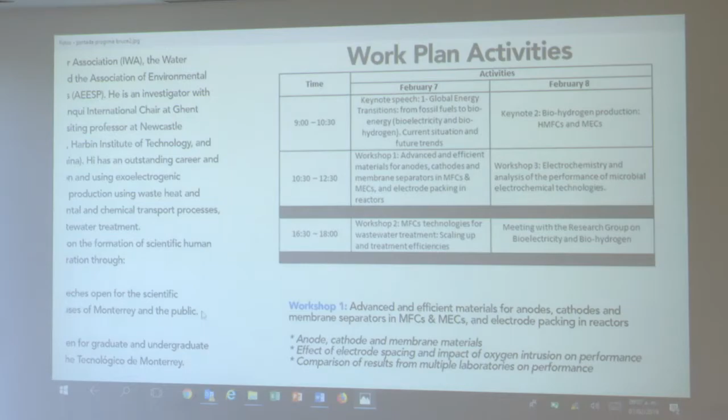Before starting, I would like to introduce Professor Bruce Logan, and I will show you a very brief summary of his experience, a very long experience, that you can also read here on the screens.

Professor Bruce Logan is an Evan Pugh University Professor of Engineering, the Stan and Flora Kappe Professor of Environmental Engineering, and Director of the Engineering Energy and Environmental Institute at Penn State University. Professor Logan is also an editor of ES&T Letters and a former associate editor of ES&T, both published by the American Chemical Society. He is currently conducting research efforts in renewable energy production and development of an energy-sustainable water infrastructure. Dr. Logan has mentored over 130 graduate students and postdocs and hosted over 40 international visitors to his laboratory.

He is the author and co-author of several books and over 500 refereed publications. Professor Logan is a member of the U.S. National Academy of Engineering and a fellow of the American Association for the Advancement of Science, the International Water Association, the Water Environment Federation, and the Association of Environmental Engineering and Science Professors.

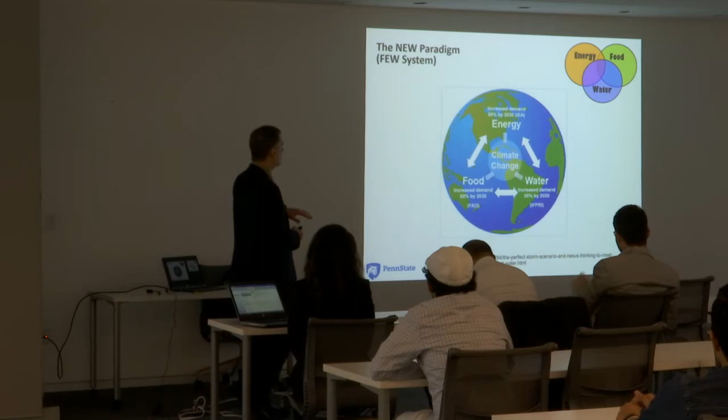So this is really the bigger picture: energy, our environment. A lot of people are casting this between energy, food, and water. Certainly all those things are tightly interwoven, as well as the focus on climate change and the idea that we might have unlimited energy seemingly sometimes, but if it's derived from fossil fuels, that's a problem relative to climate change. And so really what we would like to do is pursue energy technologies that are renewable, and avenues of providing things that we want in our lives without perhaps consuming energy, particularly within the water nexus.

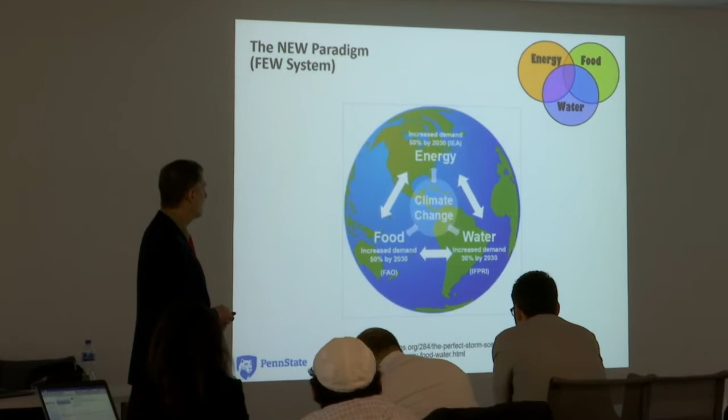The traditional view of our water infrastructure is we get as much water as we can, we don't worry about how much energy we use, and then when we're done, we call it wastewater and throw it away. But in the future, it's not wastewater, it's used water, and it's water that can provide an opportunity for resource recovery. For example, extracting energy out of the organic matter in the wastewater, or recovering nutrients and using them as fertilizers. And the water itself, of course, is a hugely valuable resource for other uses. So we don't look at it as a waste anymore, we look at it as a resource.

In my research, I've been particularly interested in the energy sustainability of the water infrastructure, and looking at how we can cut that cord between a power plant and a wastewater treatment plant, so as to not consume so much energy, or maybe even to produce net energy at a wastewater treatment plant. So how do we do that? Well, we can look at things in the water.

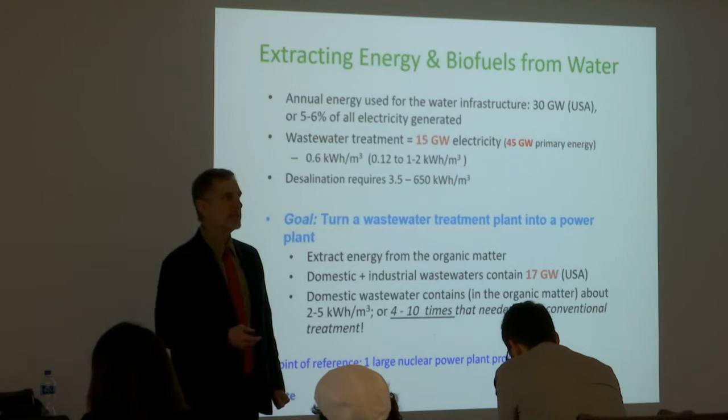In the US, we use about 5% of our electricity on our water infrastructure, and that amounts to about 15 gigawatts of electricity for our wastewater infrastructure. This is clearly not sustainable globally for adequate water and sanitation. It's too much energy, and so we need to find ways to reduce that. If you just think about the fact that 15 gigawatts of electricity is used, that probably means 45 gigawatts of primary fuel, oftentimes fossil fuel.

So eliminating the use of that electricity could potentially save 45 gigawatts. A gigawatt is essentially a nuclear power plant or a very large coal plant. So we'd like to turn the wastewater into an energy source. Typically, there's about 4 to 10 times as much energy in the wastewater than we use to treat that wastewater. So if we can obtain only a fraction of that energy back, the wastewater treatment plant could become self-sufficient.

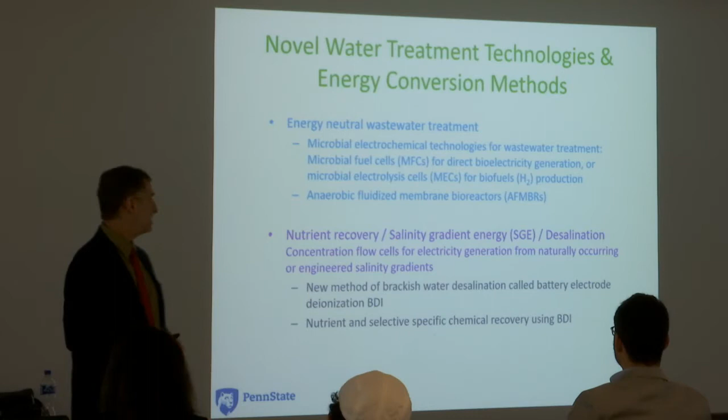So I'm going to talk about today about two subjects. Most of the time I'll be talking about this energy neutral or energy positive wastewater treatment. And then if we have time at the end, I'll just talk a little bit about nutrient removal and desalination, which are somewhat related topics. No microbiology in those, but of relevance to the sustainability of our water infrastructure.

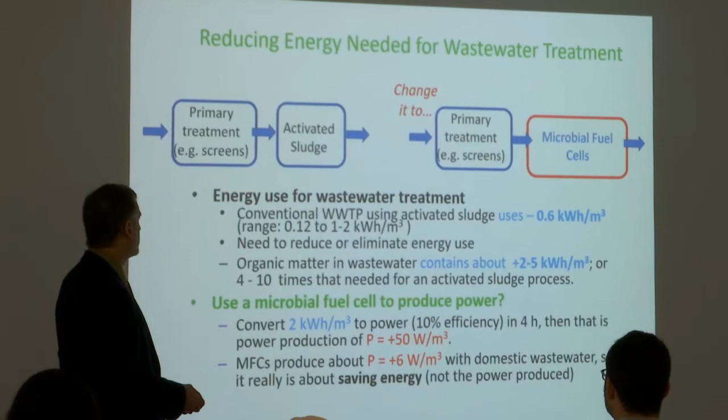So the idea here is to take a wastewater treatment plant, which is conventionally primary treatment, particle removal, and something like activated sludge, and take out that activated sludge system, which consumes a lot of energy in aeration, and substitute in perhaps something like a microbial fuel cell, which can actually generate electricity. Now, we currently use about 0.6 kilowatt hours for every cubic meter of wastewater we treat. But as I said, there's a lot more than that in the wastewater itself. So, how much of this energy could we really get back?

If we were to convert, say, 2 kilowatt hours per cubic meter in the wastewater into power at 10% efficiency, that's about 50 watts per cubic meter that we'd get back. Now, that's not a lot of energy, but as you have more and more thousands of cubic meters of wastewater, it actually starts to add up.

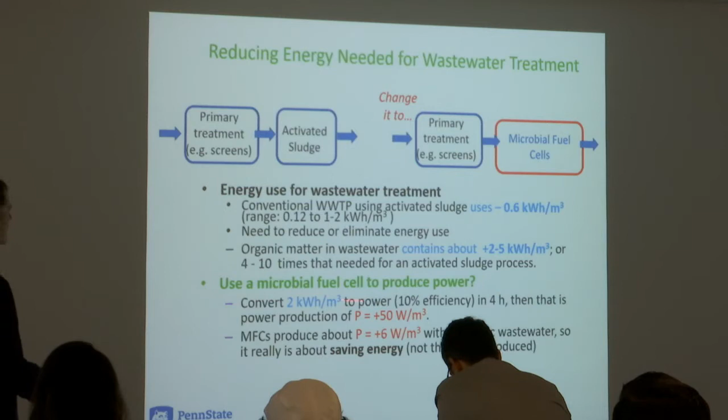More importantly, we're not using this energy to treat the wastewater, so it becomes a self-sufficient process. That's our goal. I don't think a wastewater treatment plant is going to replace a large power plant, but certainly we can remove the need for energy at that plant, or perhaps one day produce net energy. Right now we're looking at maybe only 6 watts per cubic meter, so there's an opportunity for increasing that power production and increasing the energy recovery.

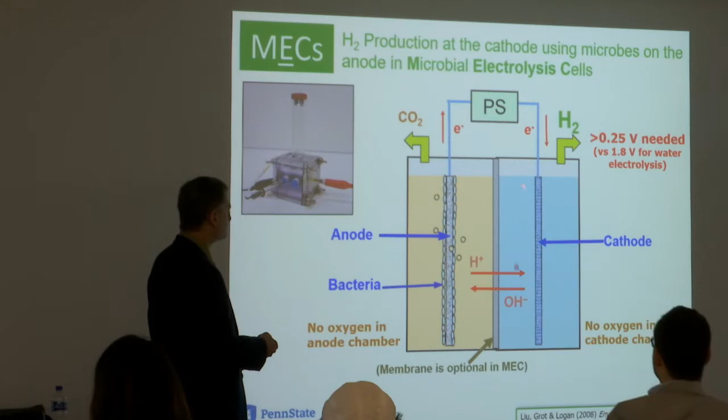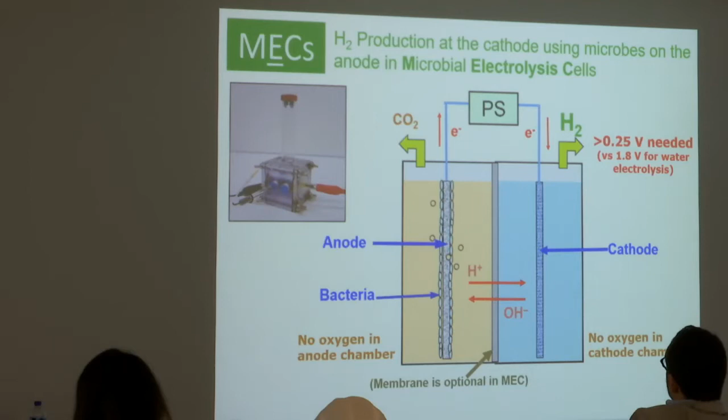We can also take the same system, shown here with a membrane in between the two electrodes, and instead of having oxygen here, we can add a little bit of extra power into the system, and instead of reducing oxygen, we can reduce water, essentially reduce protons, to produce hydrogen gas. So this is electrochemical hydrogen production, but the source of electrons is organic matter. And because we use organic matter as a favorable reaction as opposed to an unfavorable water splitting reaction, the energy needed to do this is a small fraction of what's needed to split water.

In my talk tomorrow, I will talk about microbial electrolysis cells. Today I'm mostly going to focus on microbial fuel cells. But in the general scheme, these are called microbial electrochemical technologies. They're electrochemical systems if it's just a study, but a technology if it's doing something. They can have microbes on the anode or microbes on the cathode, or both, but there has to be microbes on one of the electrodes to make it a microbial system.

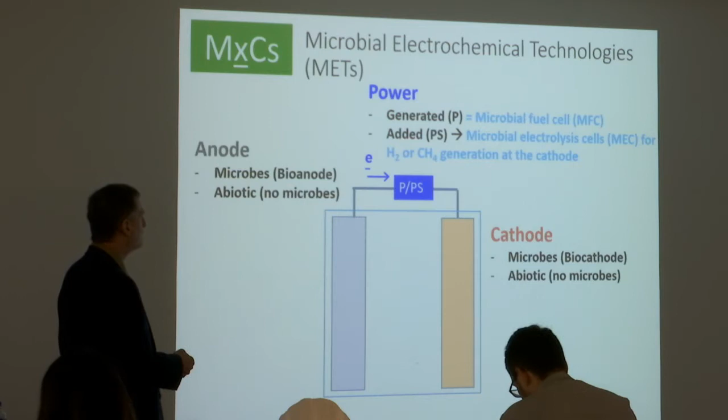Sometimes we generate power, like in a fuel cell. Sometimes we add in a little bit of power to create hopefully valuable products, such as hydrogen or maybe methane. And there can be a membrane here or no membrane, or there can actually be stacks of membranes in different configurations. I'm not going to be able to talk about all those today, but I will talk about the importance of a membrane, particularly tomorrow.

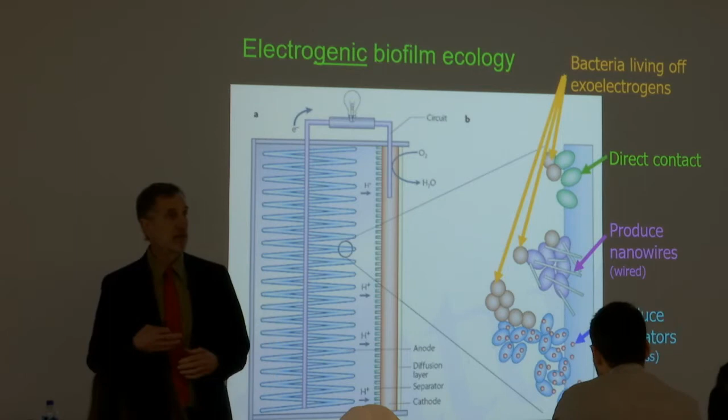So you have, in this case, a very highly porous 3D structure—this is a brush—and you have microbes that grow on that brush. The ones that can break down organic matter and make electricity, we call them exoelectrogens, able to transfer electrons outside the cell. They do that by either making direct contact with the surface, or some microorganisms produce nanowires, electrically conductive filaments that convey the electrons from the cell to the electrode. Some produce mediators, chemicals that shuttle the electrons between the cell and the surface. And within these communities, there are always other microbes that just live off the exoelectrogens' breakdown products, or maybe they ferment substrates for the electrogenic microorganisms to use.

This is a figure from a paper that will be published shortly in Nature Reviews Microbiology. What we show is that there are microorganisms from all three domains of life—bacteria, archaea, and eukarya—that can produce an electrical current. It's really remarkable that microbes with such great diversity can produce an electrical current.

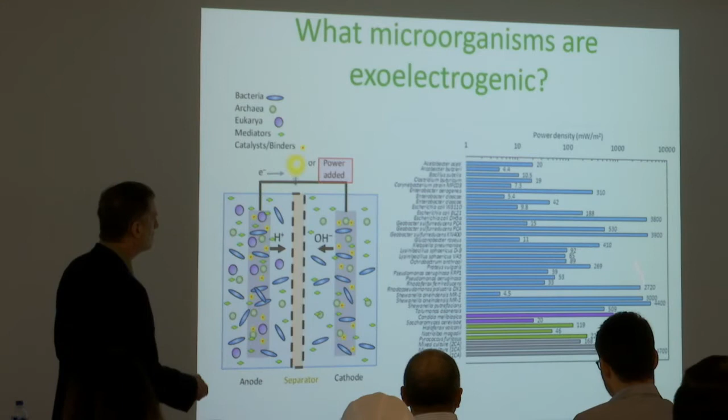They don't all do so well at making high current. This is a log graph, so you can see some here in the thousands of milliwatts per square meter, or watts per square meter. There are some that only obtain less than 10 milliwatts or lower. So they vary greatly in what they can produce in terms of current, but still that ability is inherent in many different microorganisms.

To understand what kind of microorganisms typically evolve in our microbial fuel cells, like this little one here, we took two very microbially rich samples from two different wastewater treatment plants, and from a natural bog area, which is very rich in microorganisms related primarily to methane production.

We inoculated 3 different sets of reactors, 2 from the wastewater treatment plants and 1 from the bog, and studied the maximum voltage produced each time we emptied out the reactor with acetate medium. Each cycle lasts about a day or two. The natural samples jumped up very high, very fast in voltage and sustained that, whereas the 2 wastewater treatment plants were slower to get there and looked like they would never reach that same level, but over time they actually converged in power production.

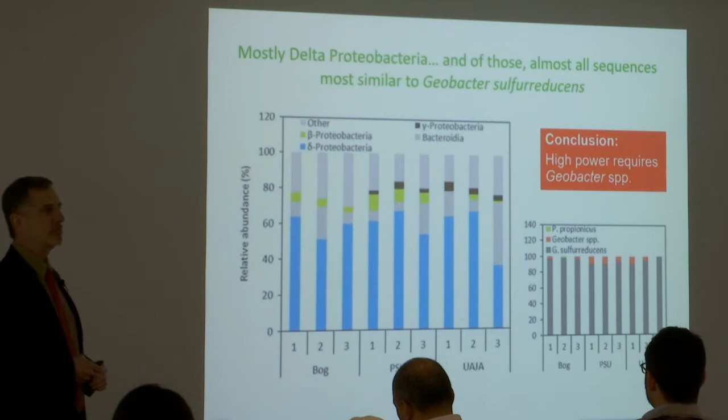So we wondered, is this a convergence of microbial community as well? And the answer is yes. Most of the bacteria in these 3 different types of reactors, the bog and the 2 wastewater treatment samples, are all delta proteobacteria. And of those delta proteobacteria, nearly all of them were identified as Geobacter species, primarily Geobacter sulfurreducens. So incredibly, no matter what the source is, with all these different microorganisms in this system, when we fed it acetate, we get Geobacter.

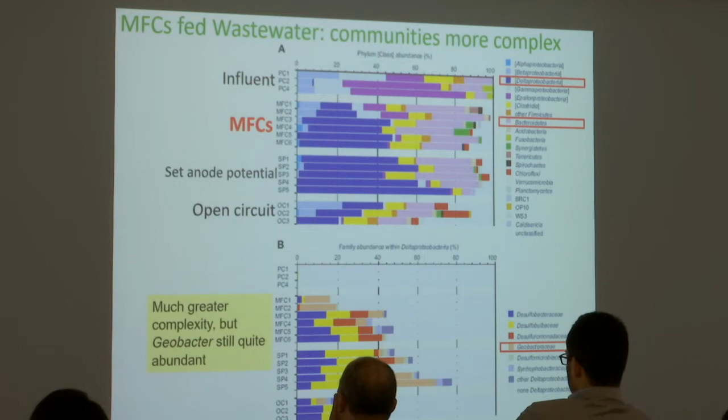In more complex systems—this isn't my study, it's a study done by Shun'ichi Ishii when he was at the Venter Institute—they looked at MFCs fed domestic wastewater, which are much more complex environments with much more complex communities. But the distinguishing thing you see here is there's still an abundance of these delta proteobacteria, largely Geobacter, but because the substrate, the organic matter they break down, is so much more complex, you need a much more diverse community to break it down. If you fed the reactor glucose, you'd need microbes to break the glucose down into acetate, and then Geobacter converts the acetate. So as the substrate gets more complex, so do the communities.

I won't talk more about the microorganisms. Obviously there's a lot more to discuss there, but to move into the technologies part, let's think about it: okay, these microbes are there, they're going to grow, they're going to make electricity. How do we design a reactor to actually make use of that capability?

It depends on certain materials—they must be inexpensive. It depends on an efficient architecture. One of the primary requirements is enough cathode area per volume, because the cathode tends to limit power production, not the anode where the bacteria are, as much as the cathode. Both are important, but the cathode's more important. A number of years ago, a group out of Wetzus and Wageningen in Europe did a couple of studies and concluded these electrodes need to be less than 100 euros, or $130, per square meter. That's very inexpensive.

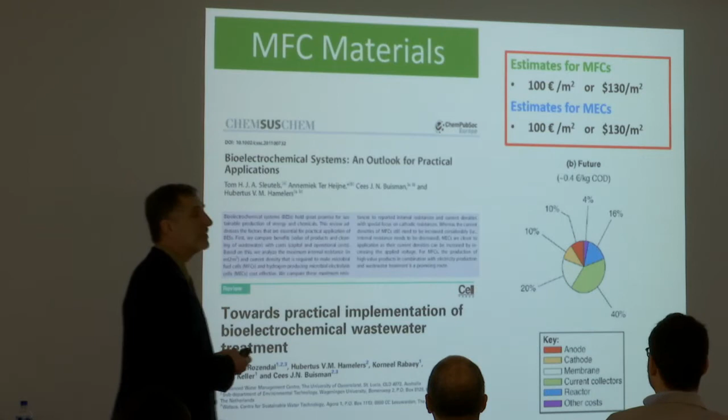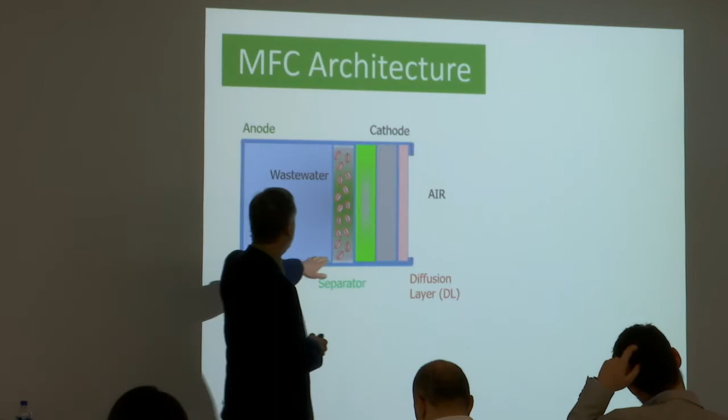What are the components that go into this? Let's ignore the tank for a moment and just say we have wastewater. We're going to have an anode where the bacteria grow, and a cathode where oxygen reduction occurs, so we have to provide a route for it to contact air. But we don't want the water to leak out through the cathode, so the air has to get in while the water doesn't leak out, so we put a diffusion layer there. Then we want to bring the electrodes close together because that reduces what we call the internal resistance, making it easier to produce more power. We don't want the electrodes to touch, and a lot of times we want to keep the microbes off the cathode, so we put in what we call a separator.

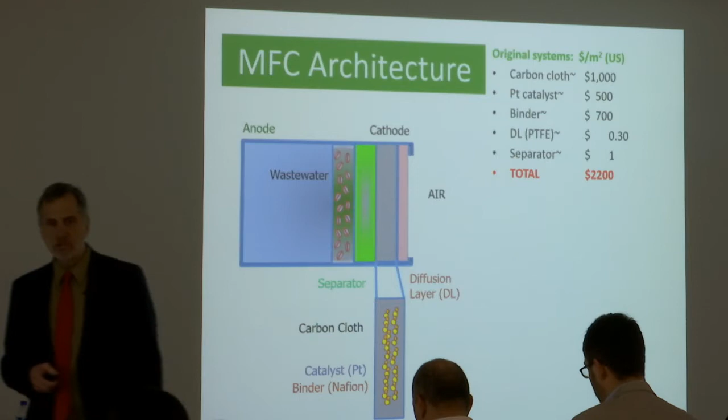The cathode in these original systems was made up of carbon cloth, a platinum catalyst, and a Nafion binder. The Nafion binder is more expensive than the platinum. So clearly, when you add up the cost of all these things, it's very expensive—over $2,000 a square meter. Clearly this was not going to work, so we had to become more innovative in reducing costs.

I think we've really succeeded in doing that. Through advances so far, we've gotten the cost of materials to maybe $30 or $40 a square meter. That doesn't mean we can make the whole system for that price, but at least the materials costs are low. So as we improve these materials or performance, we always need to keep these costs very low.

So how do we do that? Well, the first is to provide a lot of surface area for microorganisms without it costing a lot of money. So we came up with this idea of graphite fibers wound with a current collector, giving a huge amount of surface area for the bacteria to grow on. These filaments are all spread out, and they're about 6 microns in diameter. A bacterium is about 1 micron in diameter, so it's a good surface area to size ratio for the microbes. And they can be made very cheaply.

The cathode was more difficult, but it turns out that activated carbon is a good oxygen reduction catalyst at low current densities. That's great, because environmental engineers love activated carbon—we use it all the time to adsorb chemicals. It's cheap, and it can be made from a lot of things. We showed very early on that this cathode, which was actually made by Vito in Belgium, produced almost as much power as a cathode with a platinum precious metal catalyst. It's pretty amazing.

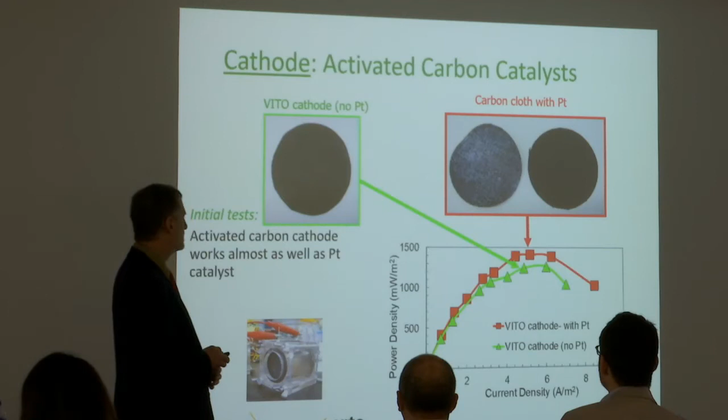Over time, we've tried to improve the cathode and the catalyst on the cathode. This is some work we did recently using a mixture of iron, nitrogen, and carbon, which we pyrolyzed onto the surface. You can see the power, compared to what the activated carbon plain does with platinum, was elevated from about 1.5 to 2.5 watts per square meter.

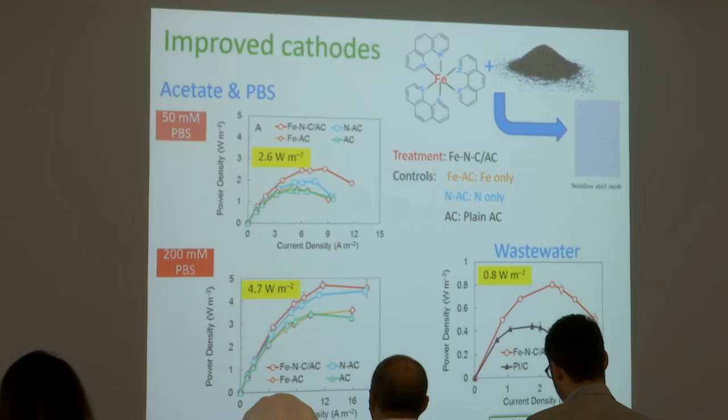If we go to a more conductive medium, we can get up to nearly 5 watts per square meter. Of course, if we go to wastewater—and I'll be talking about this more—the conductivity of the wastewater is very low, the ion concentration is very low, and because of that we just can't produce enough power. Even though the catalyst itself is better, the solution conductivity limits that power. You can see the power here is double that which we get from platinum, but it's still quite low compared to more optimum conditions of higher conductivities and better substrates.

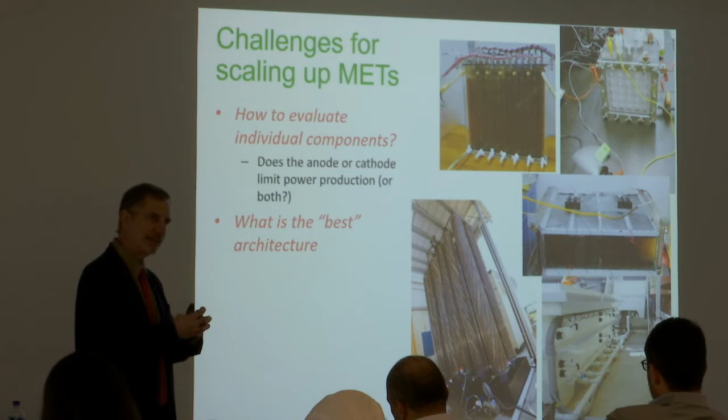So we have these little cube reactors. We want to make them bigger. How do we do that? For an engineer to design a system, we need to understand it better. How do we understand the components, how they're functioning, and how they're put together? That means we have to come up with some sort of optimal infrastructure or architecture, but we need to think about where the resistances are, where the limitations are, in designing these systems.

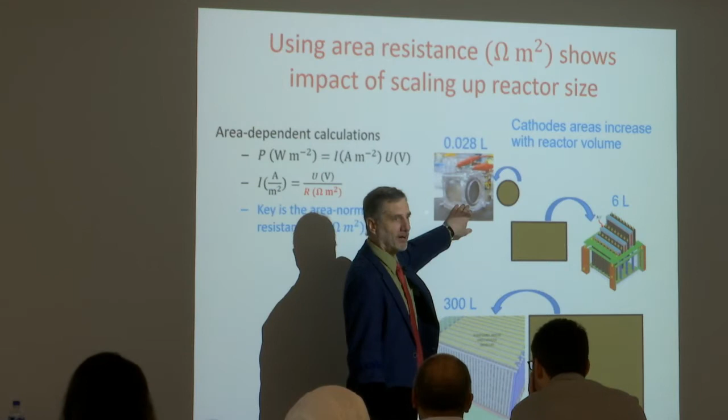This little cube reactor is about 28 milliliters—like a teacup of liquid, not a coffee cup. I've seen some really big coffee cups at Starbucks. So this is a teacup. And, you know, this is...

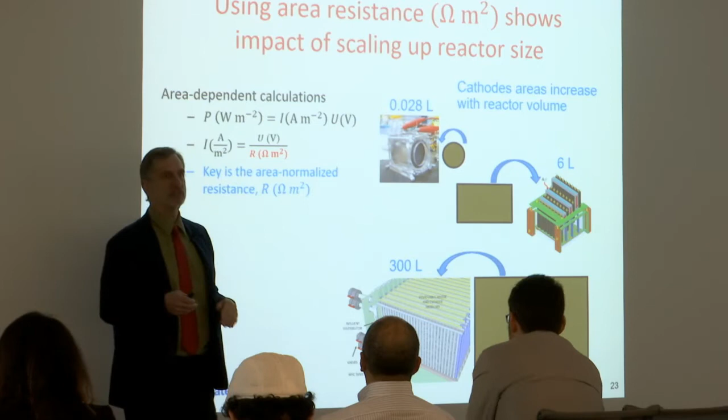As we go up in size, we look at current density, current per square meter. So if current is expressed as current per square meter, then resistance has units of ohm meter squared. That means that if current density stays the same as we get bigger and bigger, the resistance stays the same. However, if we just use current, as we get bigger and bigger, it implies resistance goes down. So we have an area resistance, and this isn't prevalent in the literature—it's a very new way of thinking about microbial fuel cells. But for the engineer to scale the system, we need to think in ohm meters squared—that is, the resistance and the area of our electrode.

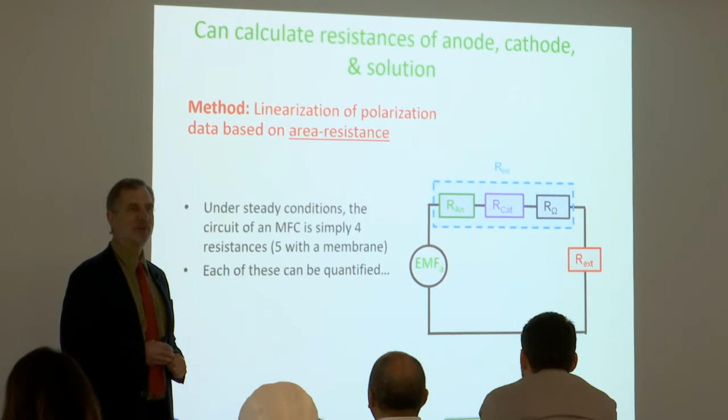Depending on your background, electrical circuits may not be something you're very comfortable with, so I'll try to make it very simple. This is like the battery—how much energy you have in the system. There's the internal resistance of the system, and then the external. This might be the light in the flashlight—this is how good your flashlight is, the internal resistance, and this is your energy source, the batteries. In a microbial fuel cell, these are the chemical reactions that are producing power.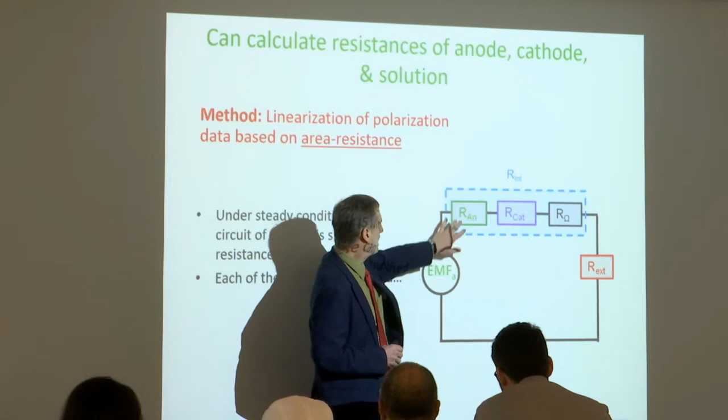These are components of our system where if we get them small, the device itself doesn't suck up a lot of the power, and then we have more power for our external load.

This is a paper we've just submitted about this. We can break the system down into our anode, our cathode, our solution, and our membrane. By doing that, we now know what's limiting the power. Is it the anode? Is it the bacteria? Is it the cathode? Is it the solution? How much do those things change?

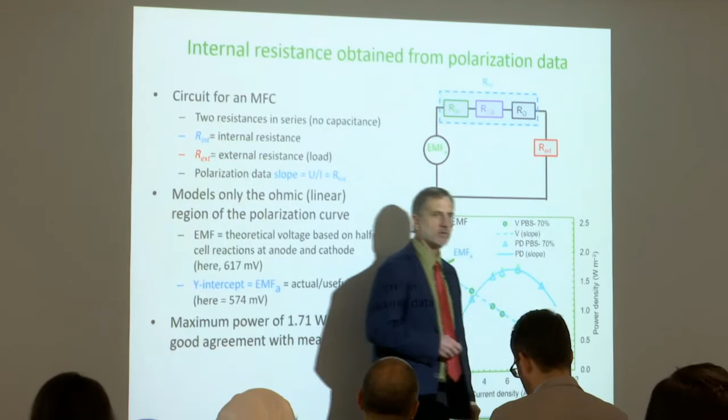The way we evaluate this system is we run a power curve, which means we put different resistances in the system. As we go to lower and lower resistances, the current goes up and up. Less resistance, more flow. Less resistance, higher current.

So this is what we call our polarization curve. If it intersects here, where the chemical thermodynamics says it should, it's a perfect reaction, but it never is. There's always this drop-off with the system, and then we tend to get a very straight line.

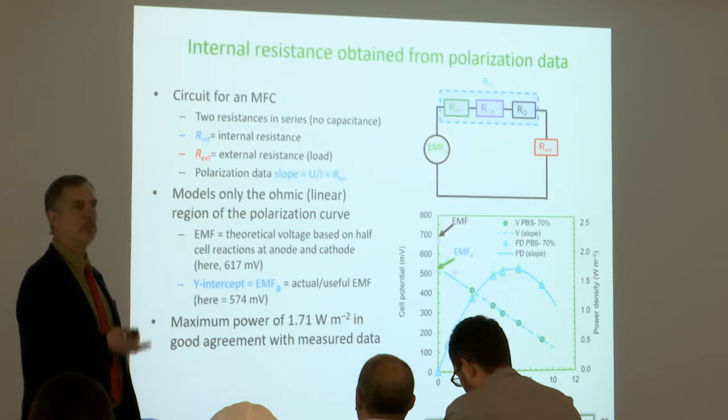If we take the slope of cell potential and current density, volts over amps per square meter, that is ohms meter squared. The slope of that line is a resistance in ohms meters squared. So by fitting that line and using this intercept, we can exactly predict this circuit.

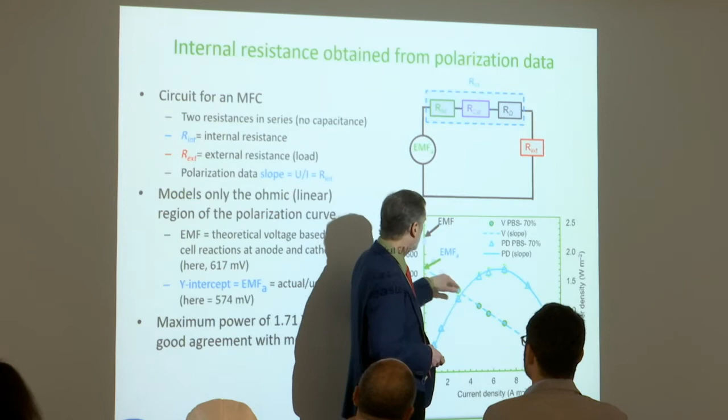These triangles are measured power densities, and the line is what we predict based on this slope and this intercept. So we can now reproduce that power density curve based on this internal resistance, and it works really well. We can predict the maximum power density, in this case, about 1.7 watts per square meter.

Now we take the next step, and we want to break it down into these individual components. So we put a reference electrode near each electrode, so we know the potential of the electrodes. Now when we're doing that polarization curve, we just measure the potentials of the anode and the potentials of the cathode as a function of current.

Based on this slope, we have a resistance for the anode. On this slope, we have a resistance for the cathode. Now we know the components of the system, and we know what is limiting our power production. We can calculate the solution resistance just based on using a conductivity meter.

With this equation — and if you're around for the workshop, I'll tell you more about it — but for our conversation here, let's just say we know how to determine these individual resistances. What can we learn from that? That's the point here now. So here's what we can learn.

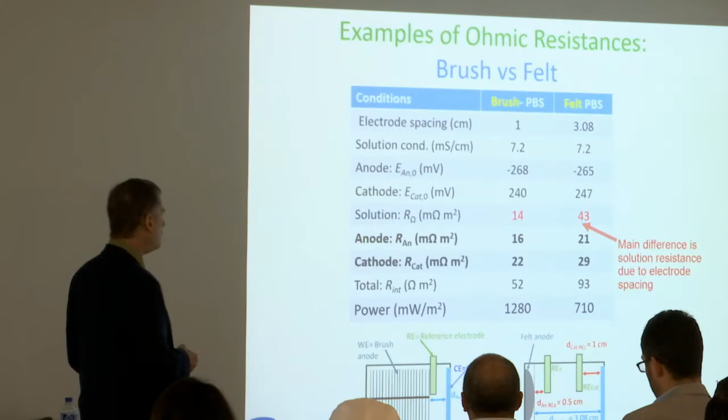I want you to look at the anode resistance, the cathode resistance, and then the solution resistance. This is with two different electrodes: a highly three-dimensional porous brush, and a flat anode — carbon felt or carbon cloth or something like that. You can't put the flat anode next to the cathode because oxygen leaks in and you don't generate any power, but with the brush, it can be very close to the cathode. That's why this brush produces a lot more power than this felt.

If you look at the anode resistance, these are in milliohms meters squared. These numbers for the anode are pretty close, so whether it's a brush or felt, it produces about the same amount of power. The cathode numbers are also pretty close, just a little bit bigger.

But look at the solution resistance: 43 versus 14. These produce a different amount of power because we kept the electrodes widely spaced. If we bring them together, we get rid of that solution resistance and can produce more power. So we produce 1.2 watts per square meter in the brush one, but only 0.7 watts per square meter in this one — and it's not because of the electrodes, it's just that the electrodes are too far away from each other.

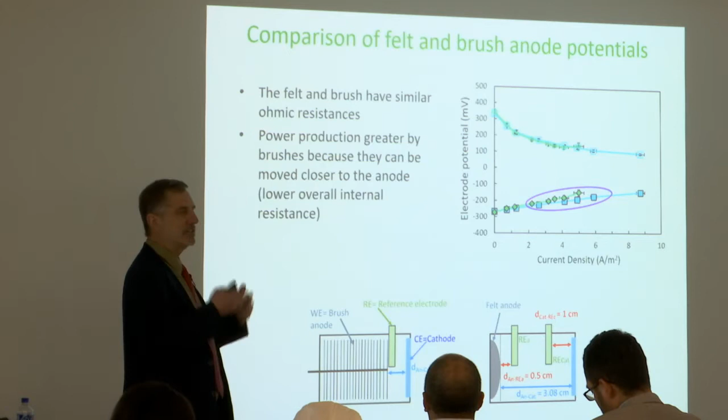In fact, you can see that if you look at these anode potentials — this is the brush, and this green one is the felt — they're pretty close. They only start to diverge right out here, and the felt doesn't go as far because all that energy it's making is being sucked up by this ohmic resistance. It's these electrical losses in the liquid — the ions just can't get between the electrodes efficiently.

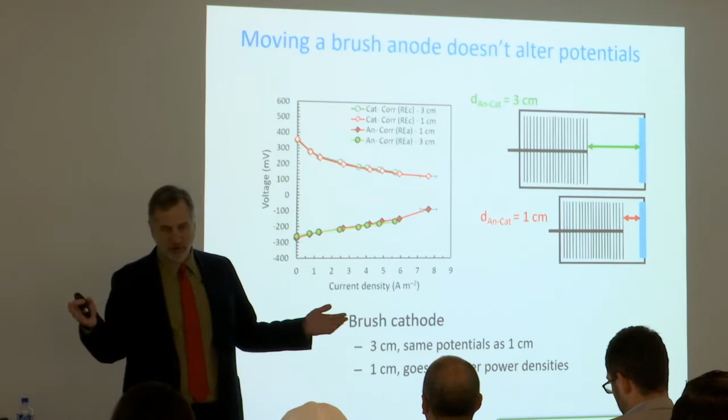So this is interesting to us because for many years we thought the felt just was really bad. But it's not really bad, it's not bad at all, it's just too far away. In fact, if you move the brush far away, you get the exact same result that it doesn't work as well, but the electrode potentials don't change at all. So this anode, both anodes work exactly the same. But if we move it far away, just like the felt, we get less power.

Now, the big thing for us is we'd like to get out of the lab and actually treat wastewater. We want to make electricity from wastewater. So what happens when we go from this nice brush electrode system with phosphate buffer and acetate, this well-buffered, non-fermentable substrate like acetate, when we go to real wastewater?

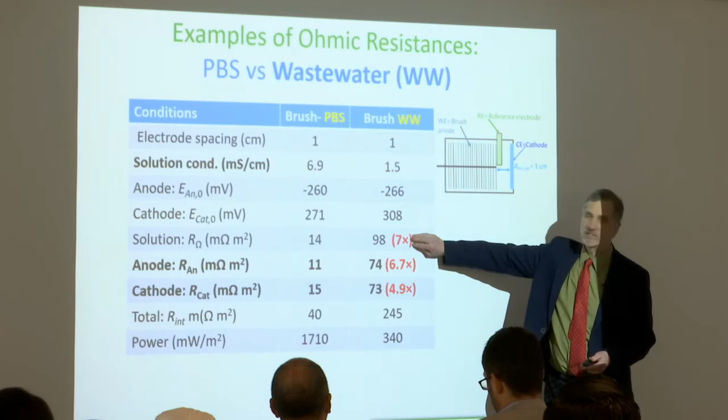Well, lots of things change. First of all, the solution resistance goes from 14 to 98. I haven't changed this distance, it's just that the wastewater is so non-conductive that we immediately increase the resistance of the solution by a factor of about 7. And then we see that reflected in both the anode and cathode resistances, they both go up as well. It's not just that the solution becomes less conductive, it's also that the electrode performance decreases as a function of that system. Now, I haven't proven here whether the substrates impact this, but the conductivity certainly is a big change.

Okay, so now we say, all right, we understand these electrodes, the distances and spacing is important. So how do we make a real microbial fuel cell? These are a bunch of different designs that people have done around the world. I'll talk in the lecture this afternoon about scaling up systems, and I'll talk more about these different designs, but basically what we started with was something like this.

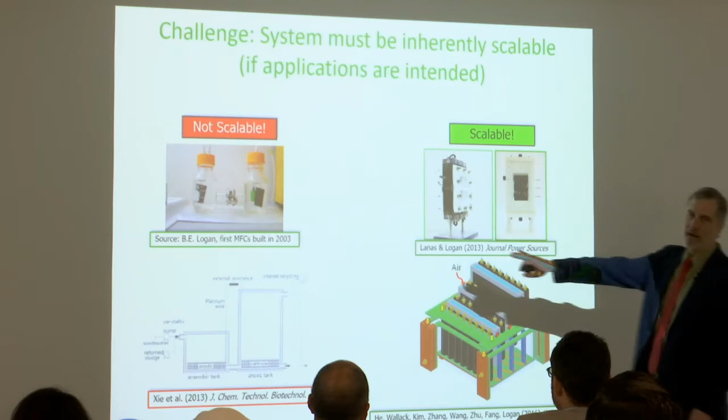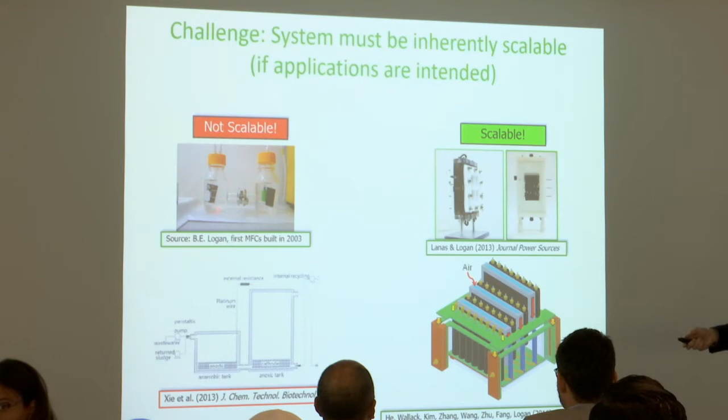Two bottles, a membrane between the two bottles, or even a salt bridge. This is not how you make a big system. You can't make one big anode and one big cathode, it doesn't work because the ions need to get between the electrodes. So you need to keep those electrodes very close and have no barrier between the two electrodes like you would in this system. So if you just want to study the microbes, this is fine, but if you want to build a scalable system, it has to be something like this.

And so in our laboratory, as we've learned how to do this, we have our generation 0. This is kind of where we started from with our first cube reactor. Then we started building slightly larger reactors with a few different brushes. Then we had arrays of brushes and multiple cathodes, and finally this 6-liter system which has multiple electrode arrays. This is the basic design.

We call it a modular design. That is, we have an array of anodes that are all linked together, and then we have a modular cathode. You can take the cathode in or out. The cathode on this side, so it's 2 cathodes with an airspace. The cathode on this side works with this brush, the cathode on this side works with that brush, and so forth.

And so the idea is we could mass manufacture these modules and then drop them into a tank. So here's a schematic of what this might look like at larger scale, going from this laboratory reactor. And I'll talk a little bit about this single module that is about 1 meter wide by 2/3 of a meter high.

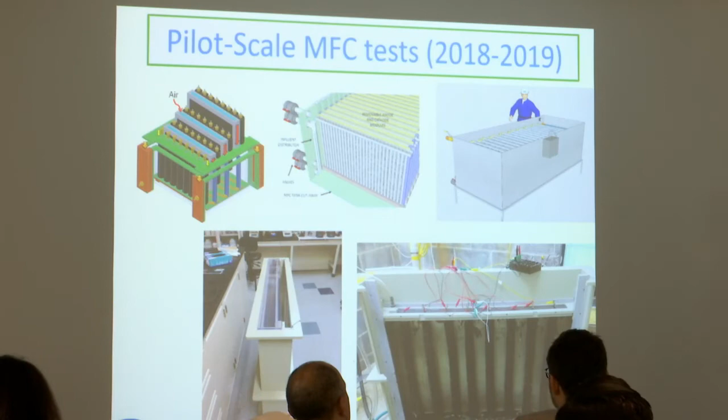So we said, okay, the cathode's the real critical step. How do we make a big cathode? And the problem was nobody knew how to make a big cathode. So we talked to some vendors all around the world to try and get somebody to build us a bigger cathode, and we got 2 companies that offered to build us bigger cathodes. We tested each one, and only one of them actually could retain water. The other one leaked, so we couldn't use that one.

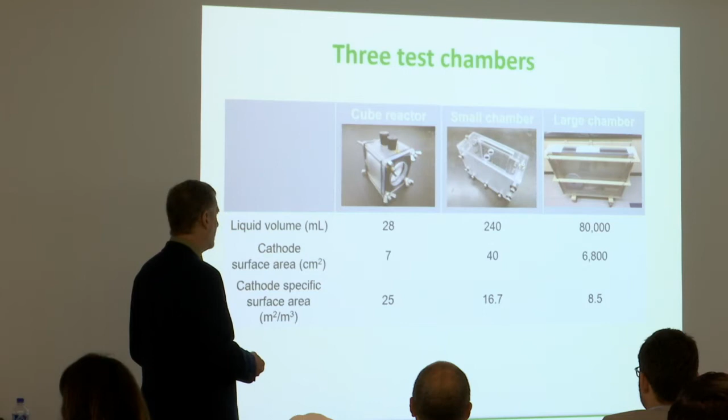And then we said, can we predict what's going to happen in this 80-liter reactor with, say, what was going on with this 28 milliliter or 240 milliliter area where all our electrode surfaces are changing?

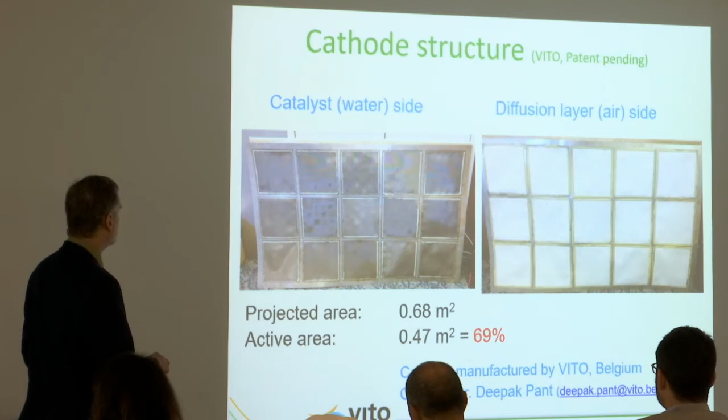This is the cathode that we finally selected. It's made by VITO in Belgium, and it's kind of like a window. That is, each one of these panels is catalyst, which is connected to a metal frame. And so if you go to the center of this catalyst area here and touch this corner here, there's almost no resistance because the electrons can flow along the metal pathway. Whereas if you made this out of one big piece of cathode, it would have very high resistance. So this was a nice design. This shows you the catalyst on one side. On this side, we have a diffusion layer, which is PTFE, sort of like Gore-Tex or Teflon, and that prevents the water from leaking out. So we can put this side against the wastewater and that side against the air.

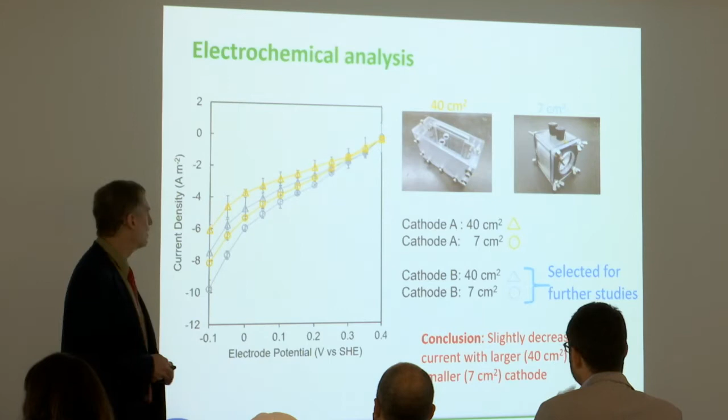Based on our little tests, we looked at what happened when we went from 7 centimeters squared to 40 centimeters squared of cathode. We saw a drop off in performance. So we said, okay, let's assume on that basis what'll happen with the bigger one. It'll look like a lot of these littler ones.

So we took this electrochemical data, which we get by running current through the cathode, and matched it with real MFC data, assuming the anode should work pretty much the same at smaller and larger scales, to see if we could predict the performance. It worked for these two little reactors, but it didn't work so well for the really big one. So here's the really big one.

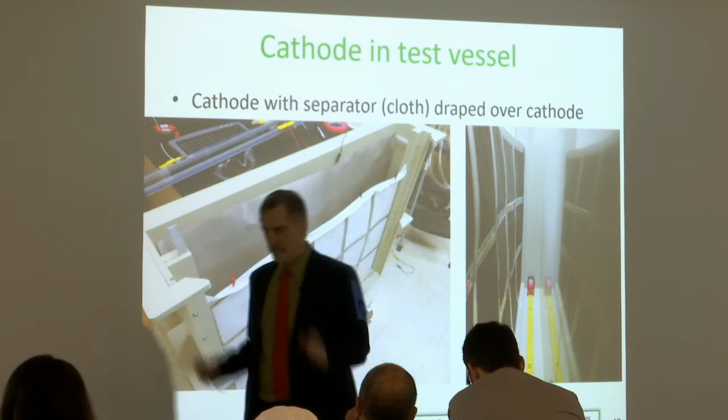You're looking at sort of a plexiglass front. This is the air chamber. So the idea here is the air is over here, the cathode's here, and the brushes are here with wastewater. You put the cathode right on the surface with the outer part removed, and we put a separator here to keep microbes off the cathode. This flexes out a little bit, so we had to bolt that to the module, and then we connected up the anodes.

And you get something that looks like this. This is looking visually at the anodes in the reactor, 22 anodes to cover one big cathode. These are big, long brushes. If you don't have enough brushes to cover the cathode, you get this much power. If you then put more anodes in there to fully cover it, 22, you get more power.

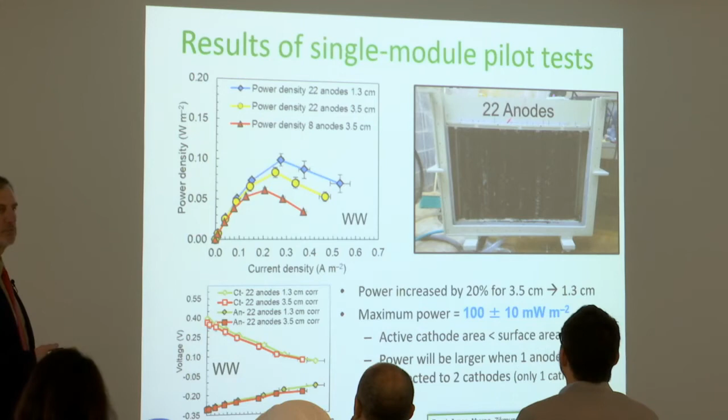And if you shrink the distance between the anodes and the cathode, you can get just a little bit more power. We got about 100 milliwatts per square meter, which is only about 20 to 25% of what we get in our smaller reactors with wastewater. So not perfect, but a good first start.

But with this data, we can now look at how well our components performed, looking at our very tiny reactor, 28 mL in wastewater, and our big reactor with wastewater. You can see the solution resistance here is actually pretty similar. In fact, in these tests we did with wastewater, the solution resistance was 118 milliohms meter squared, and it was actually a little bit more conductive in that real wastewater we tested.

You can see the cathode here was the real problem. Its resistance went up by a factor of 8. So while this cathode design is good, the resistance of that cathode still increased, and so it did not work as well. The anode actually only decreased in performance by a factor of 3.

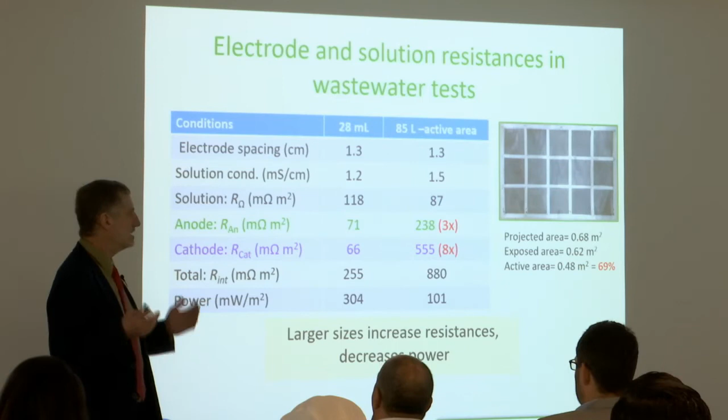So this is great — this is nature versus engineers, right? The bacteria do pretty good when they get scaled up. The cathode that we make, not so much. Nature's pretty smart — those bacteria have been developing, over maybe a billion years, to be efficient at what they do. But when we put our cathode in there, it limits performance. So improving the performance of the cathode becomes very key in terms of increasing the performance of the system.

Okay, so let's see, we're good. We're 45 minutes into it or so. Okay, so now I have a question to ask you. I've been talking all about this power. Let's put it on human terms. Okay?

You provide some numbers when describing different elements in terms of the resistance of the cathode and so on. But my question is, when you try to speak with the electrochemistry community, they will right away jump in and ask why you don't use, for example, the Randles circuit, since they consider the capacitance of the electrode very relevant. And I don't see that in your models. So also, before you go too far—

So one of the questions is, why isn't there capacitance in the system? And the answer is because we're under steady conditions, where the capacitance of the system does not impact the steady performance.

Capacitance will impact non-steady performance. The capacitance is just to build up to a certain amount of charge, and then you discharge it over a circuit. As you dynamically discharge that, capacitance becomes very important. But under steady conditions, capacitance is not as important.

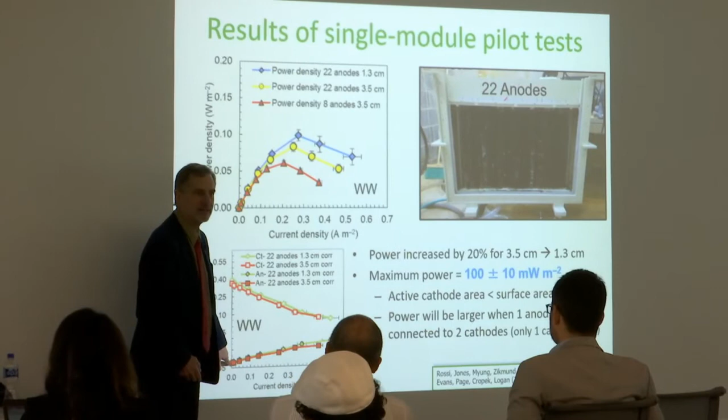And you can see this right here, actually. This is where we should be, but we're not. This area may actually, in the large electrodes, be mostly in the activation area. We're not maybe even truly in our linear ohmic loss. But look at this, it's a perfectly straight line. Those darn bacteria, once again, they do pretty well.

Feces. The problem with urine is that it's mostly ammonia, ultimately urea then ammonia, and we don't know how to get high power densities out of ammonia in these systems, which is pretty amazing because ammonia has a lot of energy. But microbiologically it's been very difficult to extract that energy in terms of power production. There are a few studies that have shown that. So really all we're extracting is the organic matter energy. I'll talk a little bit about trying to recover that ammonia so we don't have to make more ammonia, really, that's the energy saving.

Have you ever tried biomimicry methods to mimic nature to obtain more energy? One way would be a biocathode for oxygen reduction, something that facilitates... bacteria aren't catalysts, they derive energy. So we can get them to function, but so far nobody's got it to work better than these activated carbon catalysts. You lose power, you lose some energy. But don't stop thinking about that, there may be other opportunities.

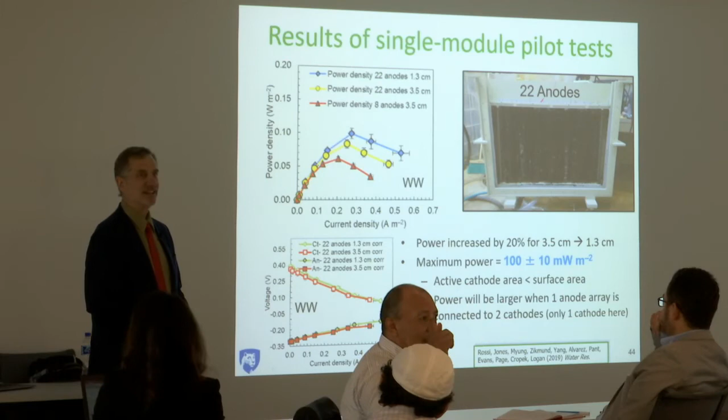So, can I ask a question? You mentioned that one important issue to improve power generation is the resistance of the solution. Have you ever tested different ways to increase the conductivity in the solution so that you can reduce the ohmic resistance?

Yeah, so we could reduce the solution resistance by making water more conductive by adding in salt. Quite simply, if you had a brine, you could add in a very small amount. You cannot go much above typically 20 millisiemens per centimeter in conductivity, which is about equal to a 200 millimolar phosphate buffer, which is about a brackish water, because then it's too salty and the bacteria die.

So a few percent of salt and they die, but it does improve performance due to that conductivity for sure. So if you're on an ocean and you're at a wastewater treatment plant, you could pull in a little bit of seawater, make it work better.

Yes, I am asking you because one of the things we were testing and proving is that in conventional microbial fuel cells, normally you can use water or oxygen in the cathode. But in our case, we replace the water or oxygen with a solution of hydrochloric acid, which increases the conductivity and also has several benefits because the degradability of the organic matter increases, so we tremendously increase the amounts of energy we can produce.

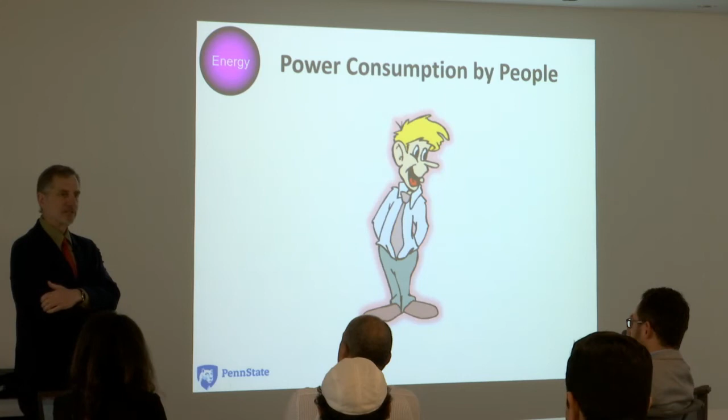The issue about using an acidic catholyte is that it takes energy to produce an acidic catholyte, like sulfuric acid or hydrochloric acid. If you have a waste stream available, it definitely is a big help, especially with microbial electrolysis cells, because if it's acidic enough, it makes the reaction thermodynamically favorable for hydrogen production, where it's unfavorable at neutral pH. So I agree, there are definitely ways to make it work better.

So I want you to think about this question for a minute, because power densities are abstract numbers. I want to put it on a very personal note. Every day we eat food, whatever units you want to use, megajoules, calories, kilocalories. So the question is, how many 100-watt light bulbs could you power based on the food you eat every day, spread over the whole day?

How many would you guess? 1, 3, 5, 10, 50, 100, 1,000, 1,000,000? Okay, I'm guessing 1,000,000 is not right.

But without making the calculation, I don't want you to make the calculation. Think of a number. Does anybody want to say that number? Because I'm hoping you say a number that's wrong, not right, actually.

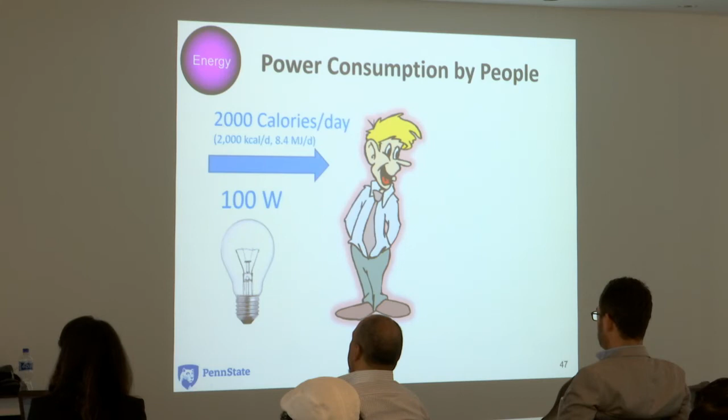Or you could say, can we power the planet by food, by cellulose? No, we can't. We can't grow enough. We use 100 times more energy per person than that in a highly industrialized society. We can't do it. So we can't expect to power our homes with what goes down the toilet. The BOD we produce is about 25 watts.

So we eat 2,000 calories. We release about 25% of that as organics in the wastewater. So you're not going to power your home with 4 people. You're going to power a 100-watt light bulb at best, and less than that. So don't set your sights too high.

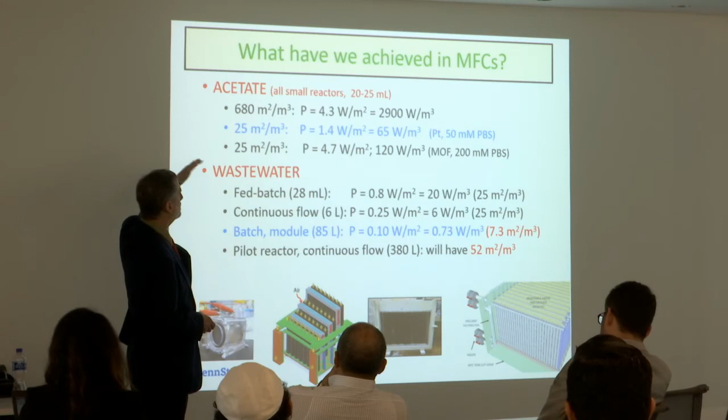What have we really done in terms of power per area? That's just how many electrodes we have, the area of the electrode. And then how much area of electrodes do we pack in per cubic meter? That's going to tell us how much power we get per volume. The best we've ever done is about 4 watts per square meter and 700 square meters per cubic meter, for about 3 kilowatts per cubic meter.

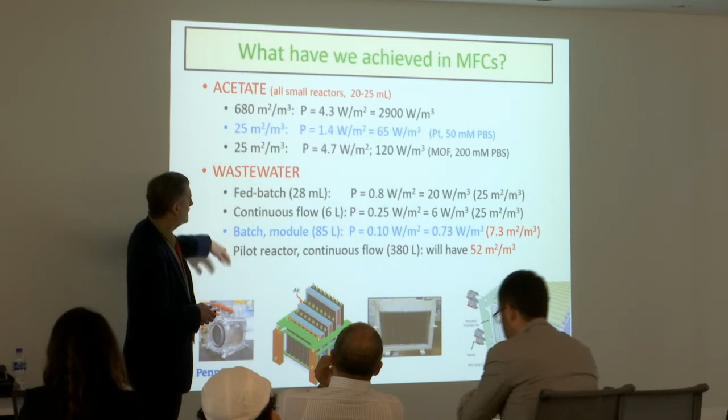But that was only done in a reactor about 20 milliliters in size. As we go to bigger reactors and more realistic electrode packing densities — because this thing would clog in a heartbeat if you tried to put wastewater through it — as you actually get into wastewater and the kinds of systems we've tested, which are about 25 square meters per cubic meter, we're looking at something like 6 to 10, maybe hopefully 50 watts per cubic meter.

These are the kinds of things which should be realistic expectations. And the numbers aren't big, but think about the food you eat.

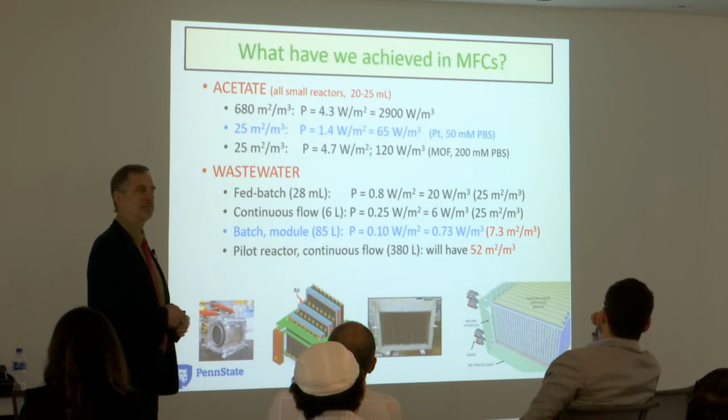That's what's going to the treatment plant, so you have to be realistic. Now, that doesn't mean on an industrial scale that we can't engineer this for specific substrates more effectively, but at least in terms of domestic wastewater treatment, it's not going to be a powerhouse. But again, getting back to my original statement, it's hopefully not going to consume electricity.

Now, there's another important aspect to this, and it gives me an opportunity to introduce another technology. The situation is that we need to treat the wastewater to get the COD less than about 60 milligrams per liter, BOD about 30 milligrams per liter, and we can't get down to 30 or 60 milligrams per liter very effectively and make electricity. There's just not enough food for the microbes to make the kind of power that we want. And we need to remove nitrogen.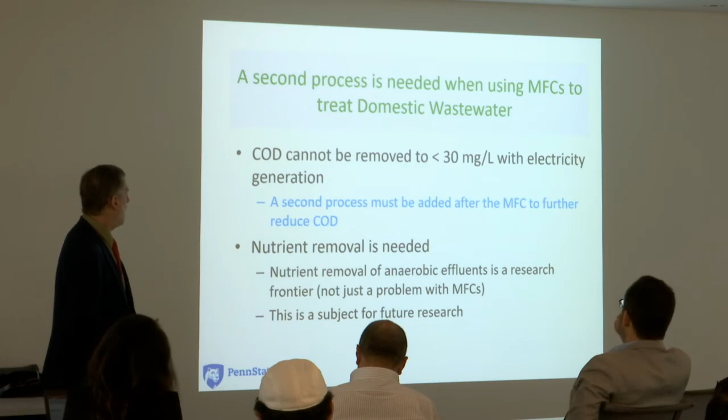We talked about the ammonia. It's in the wastewater. It's not coming out in the MFC. So we need to think about how we're going to get it out.

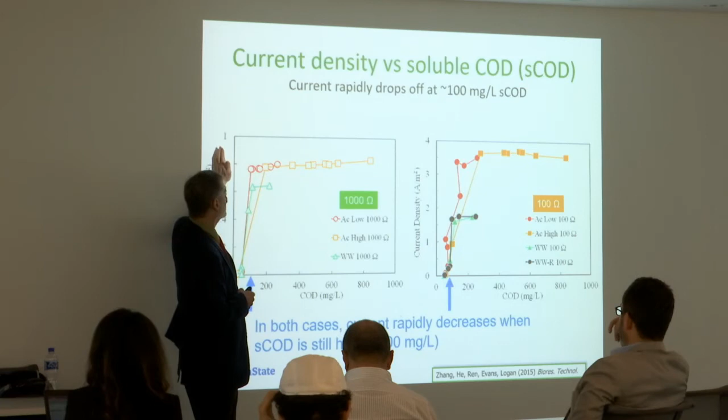So this is a graphic just to show you the COD. This is with two different resistances. This is with acetate at a high or low concentration, and this is wastewater. You can see as the COD gets lower and lower, the power is pretty constant. And then all of a sudden, it just drops down sharply. Once we get in here around about 100 milligrams per liter of COD or so, the power drops off very fast. And that's just because of mass transfer. It's due to concentration effects, Monod kinetics, and many things.

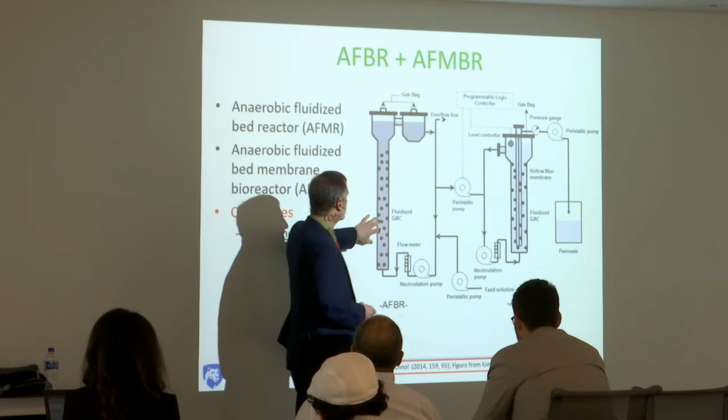It's something that we're going to have to deal with. And so there's a really nice technology developed by Perry McCarty at Stanford and another group of researchers in Korea. This is a fluidized bed reactor for wastewater treatment, followed by a hollow fiber membrane fluidized bed reactor. This reactor filters the wastewater and produces a very high quality permeate suitable for many reuses.

And so instead of using this first process, we decided to use a microbial fuel cell. One of the things with this process is it converts the organic matter to methane, which can be dissolved at higher concentrations when the wastewater is cold. And so the methane recovery is a challenge. But we said, well, what if we take this hollow fiber membrane reactor and we put it on the effluent of our MFC? Wouldn't that produce a good quality wastewater?

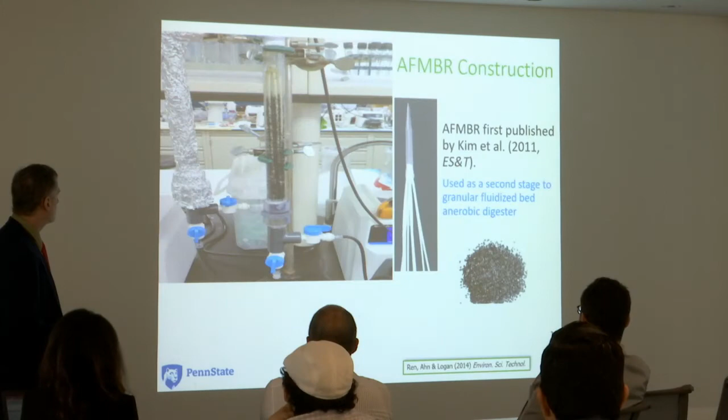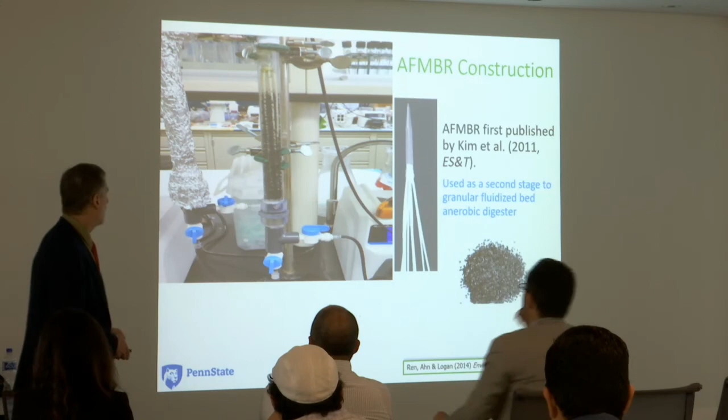Let's see if I can get this graph, this thing to run. You can see these little GAC particles bouncing around in here. What's happening is the water is being recirculated, which keeps these granular activated carbon particles suspended. And then we apply a suction to the hollow fiber membranes, and we pull the treated water through the membranes. Schematically, it looks like this.

It's just some hollow fibers where the wastewater is being pulled through. The organic matter, as it comes into this reactor, tends to adsorb to the activated carbon particles. So it very quickly comes out of solution. It's degraded on the particles. And then the water, which now has very, very little organic matter in it, can be pulled out through the membranes. And because these activated carbon particles bounce against these hollow fiber membranes, it doesn't foul. It can go a year or two years without appreciable fouling. This is an amazing technology. For a wastewater with less than 100 milligrams per liter of COD, it's a perfect technology all by itself. It really is quite amazing.

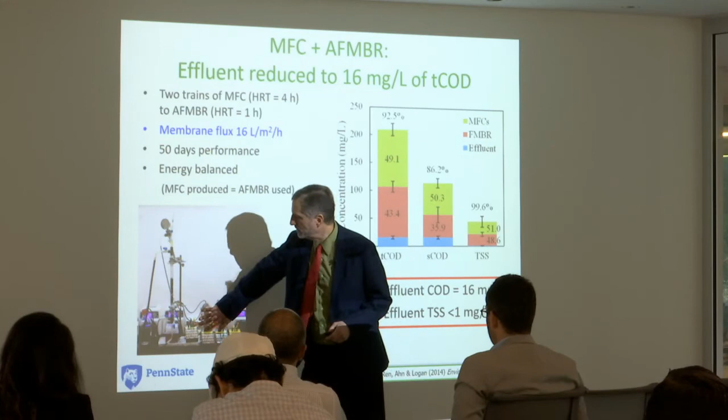So we hooked that up to a microbial fuel cell, actually a couple of microbial fuel cells feeding one of these reactors. Our effluent was 16 milligrams per liter of COD out of that membrane reactor. That's very, very high quality, with almost no total solids because it's all been filtered. No clarifier needed. It's a beautiful process of both making electricity in the MFC and effectively removing the remainder of the organic matter in the AFMBR.

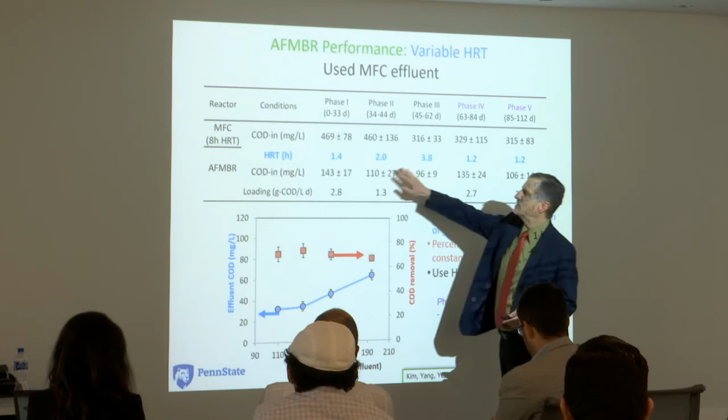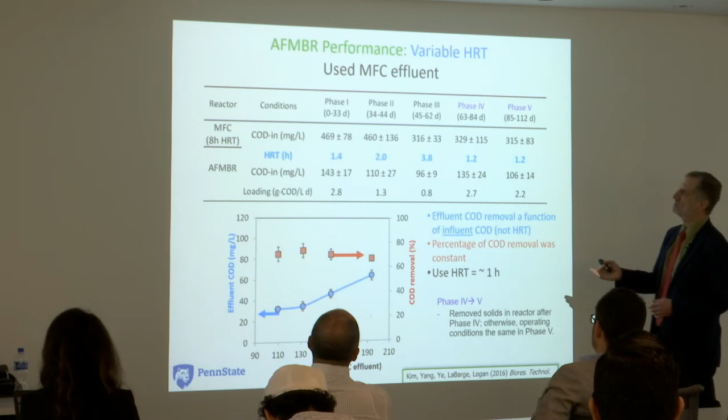We've done a little bit more work. I won't go into this too much, but I've looked at the hydraulic retention time, which is only about an hour in one of these systems, quite short. We thought maybe it would work better if we went to longer retention times. No, that's not true. It's actually an hour is fine because the adsorption of organic matter is very fast onto that activated carbon. So pretty much no matter how you load it, as long as you don't load it too much, it will work pretty well. At 100, 150 milligrams per liter of COD going in, that system works very well.

So this is where I'm going to conclude the first part of the talk. I'll go to the next slide before I ask for some questions again. We have modular designs, we have bacteria that can do a pretty good job. It doesn't mean we can't help them do a better job on the anode. That's something we'll talk about later on if you're around.

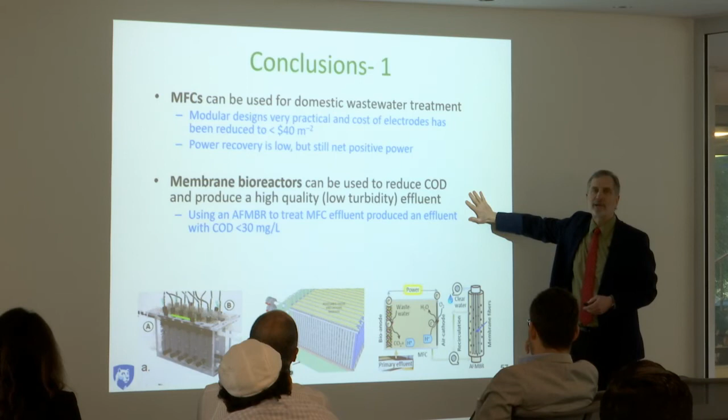But we have to recognize that we can't do everything with just a microbial fuel cell. If we're really going to treat the wastewater, we're still going to need a secondary process. This is one that's good. We're looking at other ones that we could do as well.

Ultimately, to make the full system work, we also need to think about nitrogen and phosphorus removal. Phosphorus removal can be done chemically pretty efficiently, but removing ammonia is somewhat difficult. It can be done with Anammox, which is a very finicky process, shall we say. And you don't actually recover the ammonia, you destroy it. Same thing with nitrification, denitrification—you destroy it, you don't recover it.

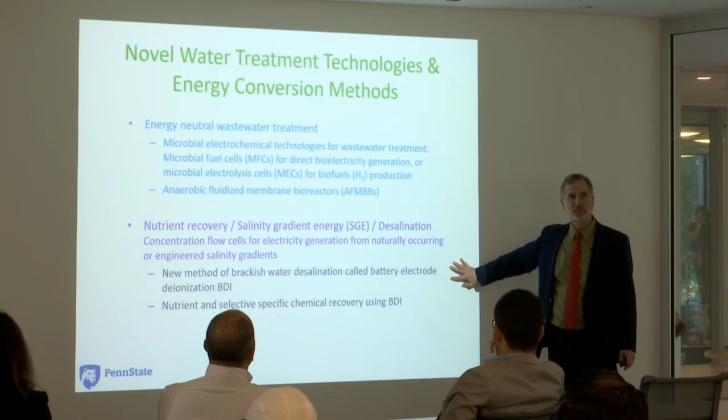I have about another 10 minutes or so to talk about nutrient removal, and actually desalination, because it's a technology related to that. But maybe I'll take a break here and ask: are there other questions that I can answer now before we finish up that piece?

I would like to make some comments with respect to what the professor is talking about in the last part. We think that one of the main purposes is to treat wastewater, and additionally it is possible to produce electricity or energy—it's a plus that we can obtain. So what the professor mentioned, the necessity to remove organic matter, nitrogen and phosphorus from the wastewater, is probably the main purpose of the cleaning of wastewater. What we are looking for is to, in some way, recover some of the energy that is available, such that we can make the system more sustainable in the future. That's why this issue is very important.

I would add, I have focused on domestic wastewater treatment, but consider an industry, particularly food processing—maybe something with a lot of sugar in the wastewater—where this would work very well because of higher concentrations of organic matter and not a lot of particles. So there are opportunities outside of just domestic wastewater treatment, but I've focused on that as a more widely applicable technology.